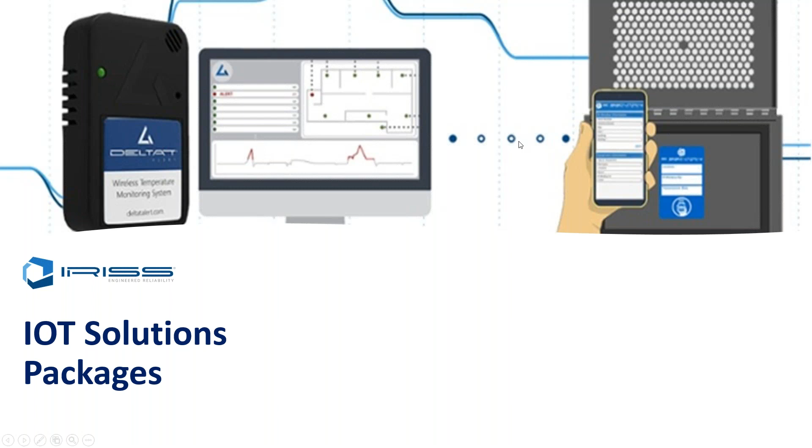Then we come over to our IoT solutions packages. We have our Delta T temperature and humidity monitoring sensors. They allow you to get constant data from your equipment whilst no one is out there taking the data down. We have an eSentry Connect NFC data management and labeling solution that allows you to put that data up into the cloud so that everyone can access it from wherever they are in the world.

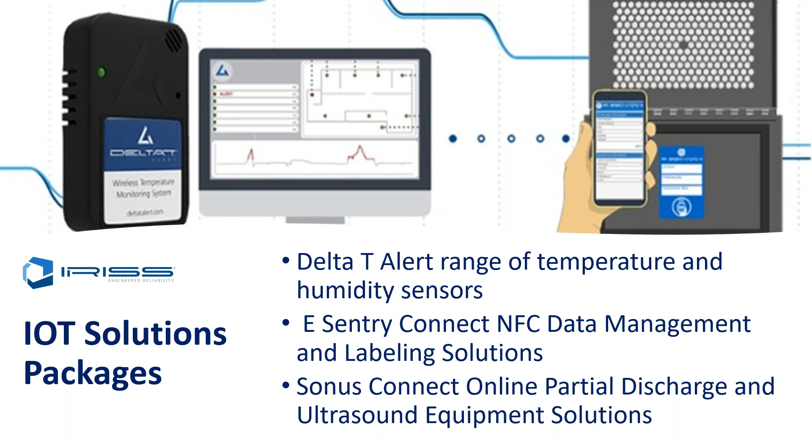And then our Sonus Connect online partial discharge and ultrasound equipment solutions allow you to do remote online partial discharge and ultrasound inspections of your assets when no one's there. And our newest product range is the Safe Connect thermochromic solutions.

Now, what these Safe Connect thermochromic solutions do essentially is they add memory to infrared scanning. If you're looking inside a panel and you're looking with an infrared camera, great, you're doing proactive inspections of your equipment, but the problem is you only see what you're seeing when you're seeing it.

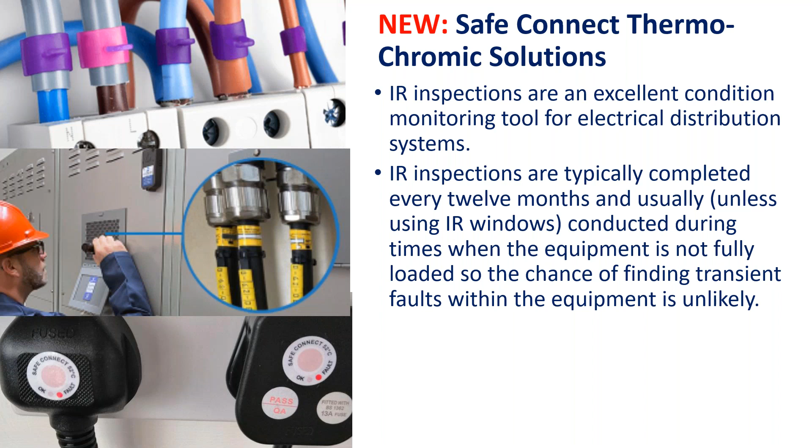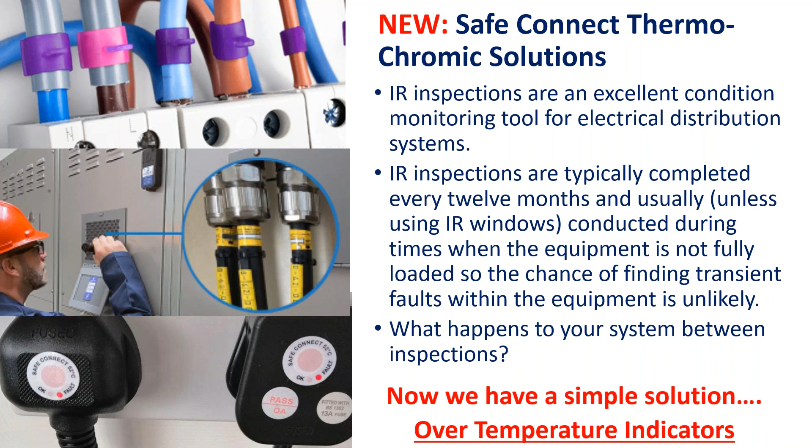Say the panel you're looking at only runs once a month, and then it's overloaded and you don't know about it because you're not looking at it at the time when the panel's running. Well, that's why we brought this out. If you only have a 12-month inspection cycle, you're not going to know if things happen in between those 12 months. But if you leave one of these clips on your system and it changes from purple to pink, it tells you that the system had an issue when no one was looking. It's an over temperature indication solution, and it essentially adds memory to your infrared scanning.

Now, to touch upon Edwards Deming, this is one of my favorite quotes: your system is perfectly designed to give you the results you're getting. What does that mean? If you like the results that your system's giving you, the data is great, change nothing, you built it right. However, if you don't like the results you're getting, then there's a problem with your system, and maybe you need to redesign it to give you better results.

Now, when we talk about maintaining equipment, language is everything. And we need to shift the mentality from maintenance as an overhead to reliability as a necessity. If you ask someone if they want more maintenance, the answer will often be no, because it's seen as a cost. Who wants to spend more money? Maintenance isn't really doing anything, let's just cut that budget. Now let's shift that perspective to reliability. In order to get equipment reliable, it needs to be maintained correctly. Reliability is always going to be seen as a necessity and an asset. If you ask the same question and say, hey, do you want this equipment to be more reliable? Nobody's ever going to say no, because reliability is a necessity, maintenance is an overhead. Language is everything, and we need to send that point home.

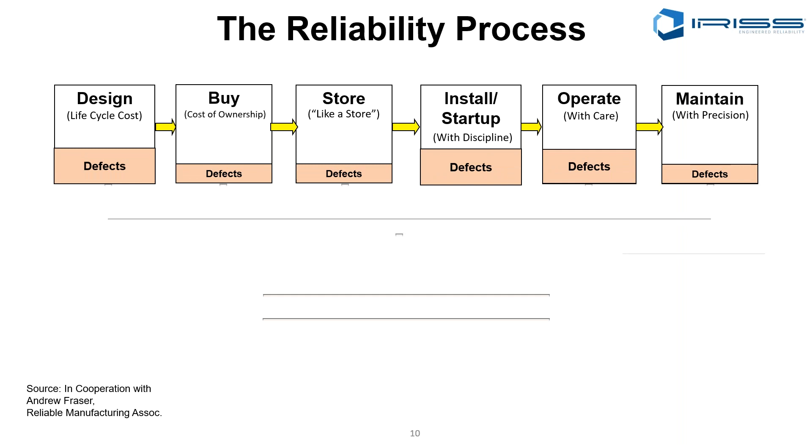So I'm going to touch upon the reliability process. And this slide goes over the design stages of building a program. And people think that you build the system, and when you get to the maintenance part, you just maintain the system that you built. But the problem is that reliability in a nutshell is all about defect elimination.

So when we're designing the system, we can introduce defects. We need to design them out. When we're buying our parts, again, we can introduce defects. We need to buy the correct parts. When it comes to storing the parts you got, you better be storing them correctly. You better be turning them over and making sure they work, because otherwise, when it comes to putting those parts in, again, you're going to introduce defects. Install and startup, we have to use precision maintenance. Be very careful here as to not introduce defects and make the equipment likely to experience infant mortality. When we operate our system, we can again carelessly introduce defects if we don't operate it with care. And then with maintenance, yeah, we can introduce defects, can also take them out.

But the one thing we cannot do, we can't maintain our way to reliability. So what does that mean? We have to put weight into each of these steps, being careful to make sure no defects are being added, and in fact, we're removing defects as we go along. Just remember, reliability is all about defect elimination, and you cannot maintain your way to reliability.

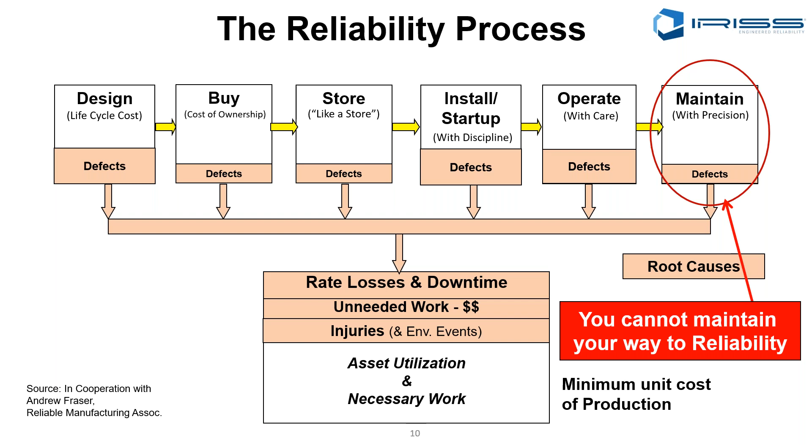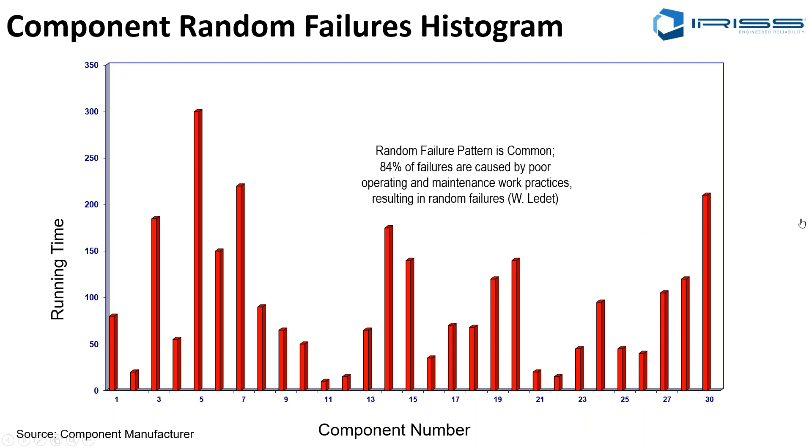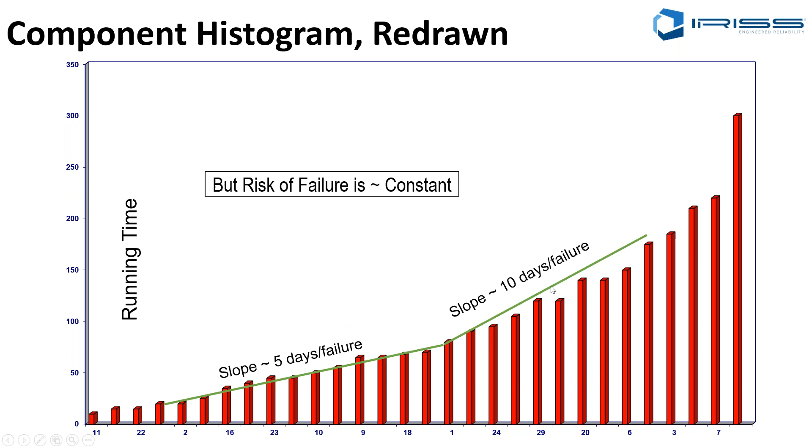Now, if we rearrange that histogram, put it from fastest failure rate to longest failure rate, what do we see? Roughly half of our assets are failing in the 5-day period, and roughly the other assets are failing in a 10-day period. So how do we maintain these assets? If we use a time-based strategy of 5 days because half of our assets are failing in 5 days, then what we actually did is dramatically over-maintained half of our assets. And if we maintain our assets on a 10-day cycle, then we're dramatically under-maintaining our assets that fail in the 5-day cycle. So this asks the question, what do we do? Time-based clearly doesn't work because things don't fail on a time-based cycle. So what we have to do is move from time-based to condition-based way of thinking, where we see what the assets are telling us and then move forward from there.

Now, these 4 studies are major studies on reliability-centered maintenance. Two were done by airlines, the United Airlines study and the Bromberg study, and two were done by the US Navy, one on surface warships and one on submarines. The studies went over the different failure patterns and the distributions of those failure patterns, and there's some interesting results.

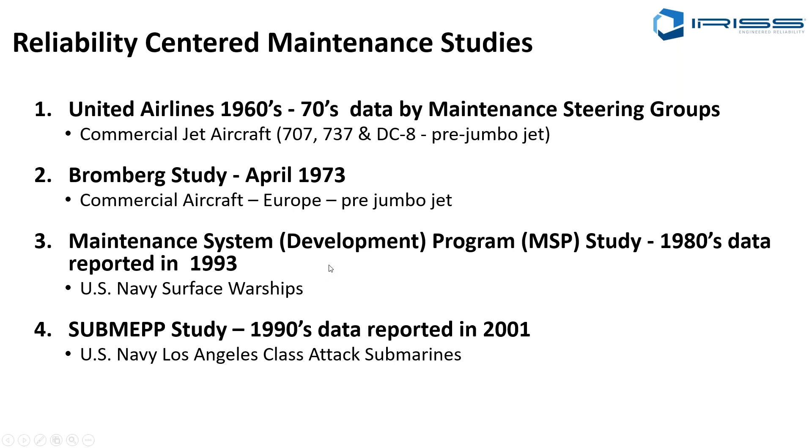The first 3 failure patterns we see are the bathtub curve, the wear out curve, and the fatigue curve. Bathtub failures happen typically 3 to 4% of the time. Wear out, 1 to 17% of the time. Fatigue, 3 to 17% of the time. This is the data from each of the individual studies, and it's pretty consistent.

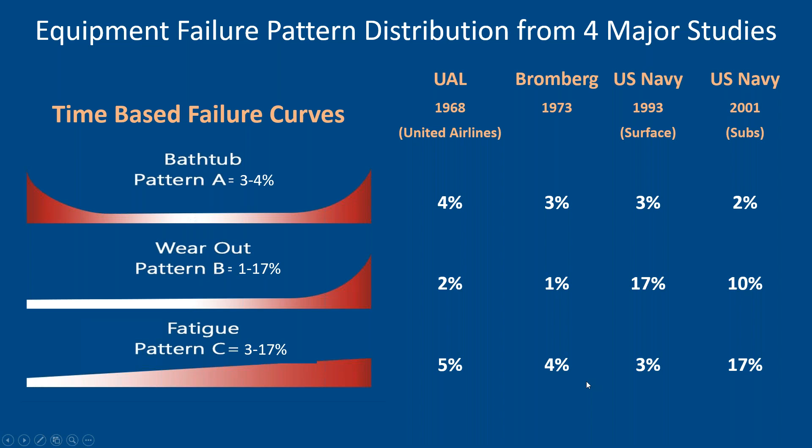Now we come to the next 3 failure curves, and this is where we see the majority of failures. The initial break-in period is 6 to 11%, random is 14 to 22%, and infant mortality makes up the majority at 29 to 68%. Now, what is infant mortality?

It's when you put your equipment into running conditions and you don't do a great job at being careful in what you're doing, so you introduce defects. Or the alternative is you go back into your equipment, touch things, tighten them, physically interact with the gear, which resets the infant mortality curve.

From these studies, we see that the Navy doesn't quite agree with the general business results, and the reason is that the Navy practices super precision maintenance. The book on doing any activity in the Navy is 5 inches thick and tells you everything. If you've got to turn a bolt, it tells you how to turn that bolt, how many degrees, at what temperature, how you put lubricant on it afterwards, and then where you'd put it into a bed and tuck it in at night. The maintenance practices are fantastic, but they typically aren't realistic in the world outside of the military.

Then we come to random failure patterns, and you see more random in the Navy because they've worked out the infant mortality problem and come up with a better way.

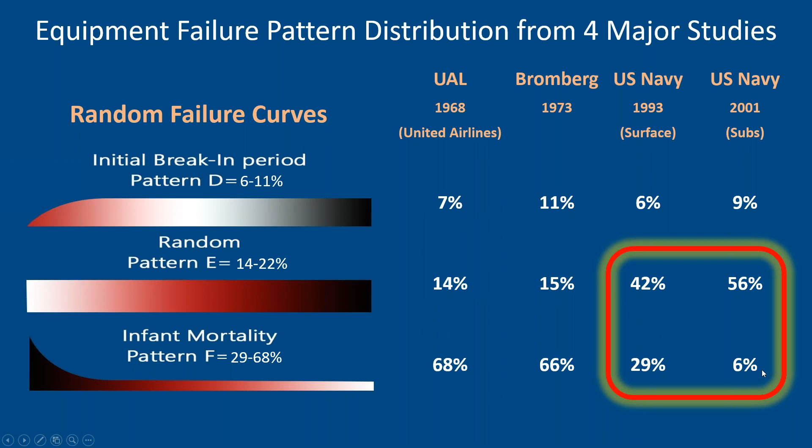So what are the effects of time-based maintenance on infant mortality? This shows us different times where you would be inspecting equipment on a time-based maintenance schedule. But the only point you should actually be doing anything with your equipment is right here. You know why? Because there's been a change. Your equipment's telling you, hey, something's not quite what it once was. Let's go in there, take a look, and conduct repairs based off the results of taking a look.

Touching the equipment here, here, here, and here on a time-based schedule did nothing. There was no reason to interact with equipment. Here it's trending in a better way. Here there's no change, no change, no change. Oh, change. Let's go take a look.

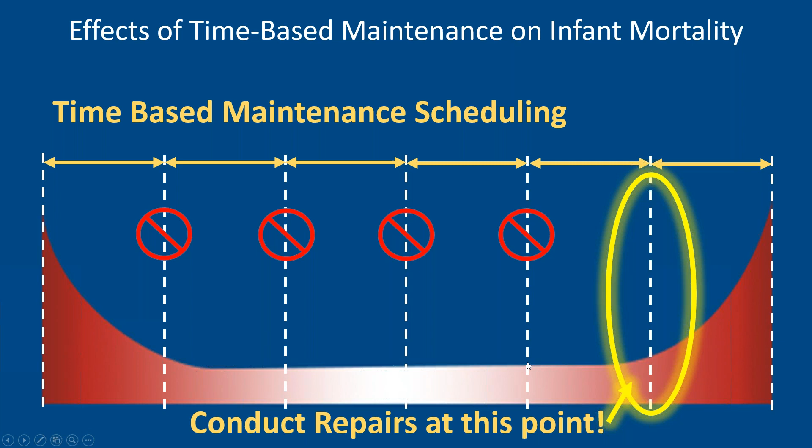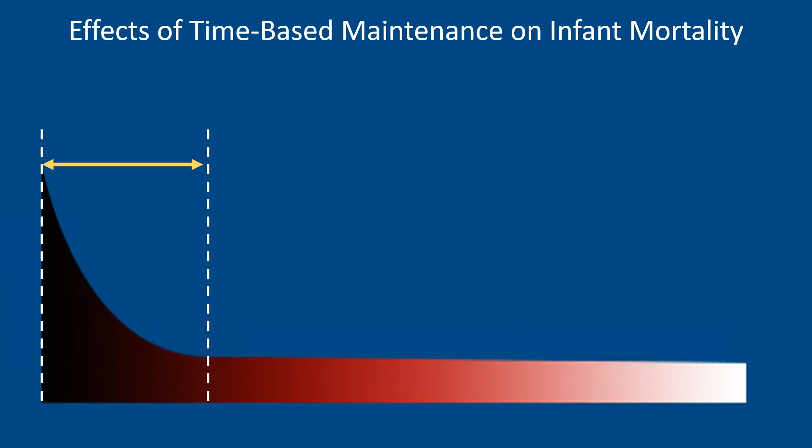We can inject defects every time we physically interact with equipment. So what does that mean? Don't interact with equipment. There is no reason to touch equipment for no reason. All we do is introduce the opportunity to inject defects, and we reset the infant mortality clock, which, as the slides prior showed us, was the time where we're most likely to experience failures.

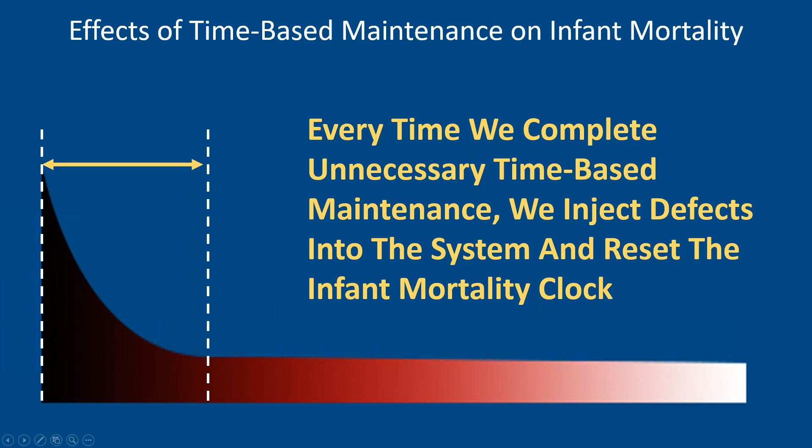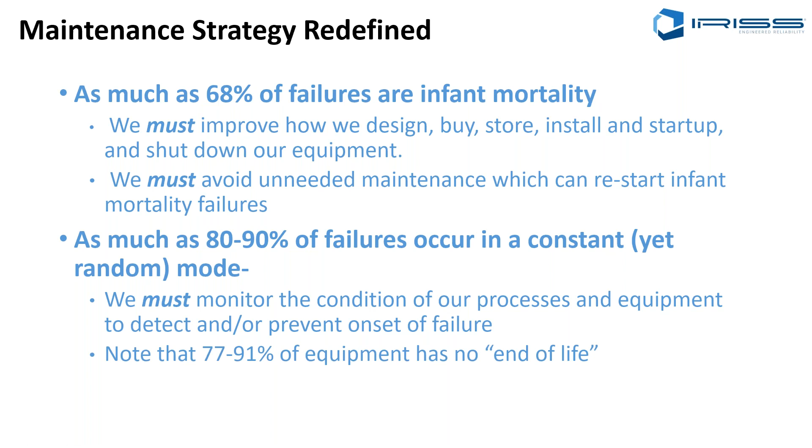So what if we could redefine a maintenance strategy? As said earlier, as much as 68% of failures are infant mortality. We can improve this by avoiding unnecessary maintenance, and by how we design, buy, install, store, and start up equipment. Unfortunately, as much as 80 to 90% of failures occur in a constant yet random mode. For this, we must monitor the condition and only interact with it when we see an onset of failure or a reason to do so, because 77 to 91% of equipment has no end of life.

So let me give you some examples of maintenance strategies. Strategy 1: there's a shutdown required. The asset isn't broke, but we're fixing it anyway. That don't really make much sense.

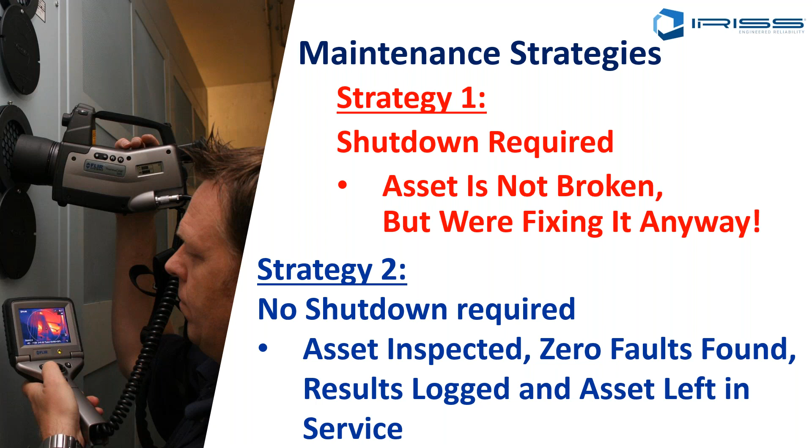Strategy 2: no shutdown required. The asset's inspected, zero faults were found. The results were logged, the asset was left in service. Sounds a little more logical.

Strategy 1, isn't broken, we're fixing it anyway. That's planned time-directed maintenance. Strategy 2, we're looking at what's going on. There are no faults. We record the data, we set our trends, we leave the asset in service, and we come back and look at another date. This is a condition-directed repair program. The conditions didn't direct a repair, so we didn't do one.

This leads me to a really fun fact I bring up all the time in presentations. The Mars Rover was designed by NASA engineers to last 90 days. Do you know how long it actually lasted? 14 years.

This is a highly engineered piece of equipment that people didn't think would last longer than 90 days, but it lasted 14 years. Why? There's nobody on Mars to touch and mess with things, tweak, break, crank, try and fix it. Like we said earlier, if it's not broke, don't fix it. You know what killed it in the end? The batteries died. Certain components will eventually wear out over time, but this machine went far above and beyond because people left it alone to do what it was designed to do.

This brings us to about the first third of the presentation. I'm going to stop and see if anyone has any questions, anything they need clarification on.

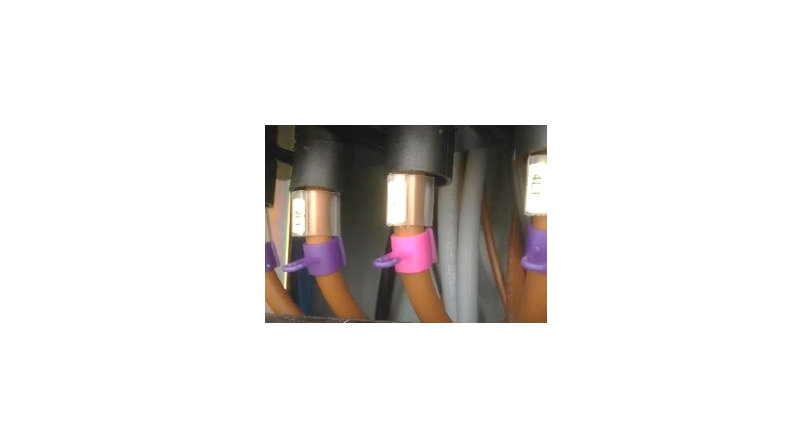Here are some examples of poka-yoke or mistake-proofing devices. This is a thermoclip, one's purple, one's pink. You can look at it and see simply that on the pink one, something's wrong. There's been temperature indication. No one would have any issue using that.

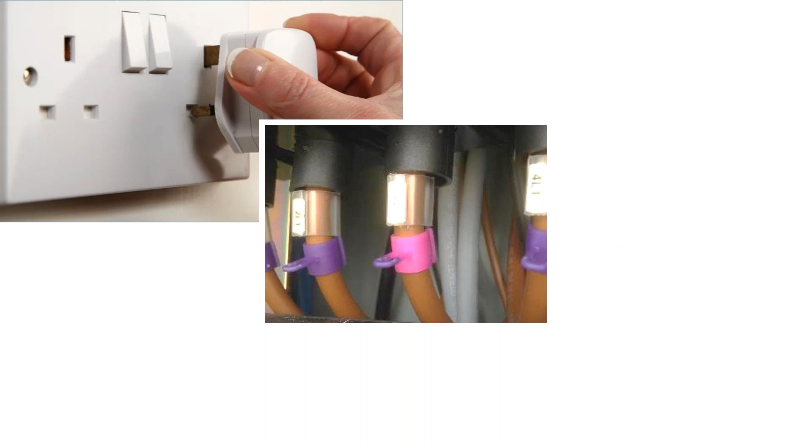Here's a UK plug socket, another poka-yoke device. It goes in, it has a very specific configuration of pins that will only be the only pins that will fit into that hole to get the power out of it.

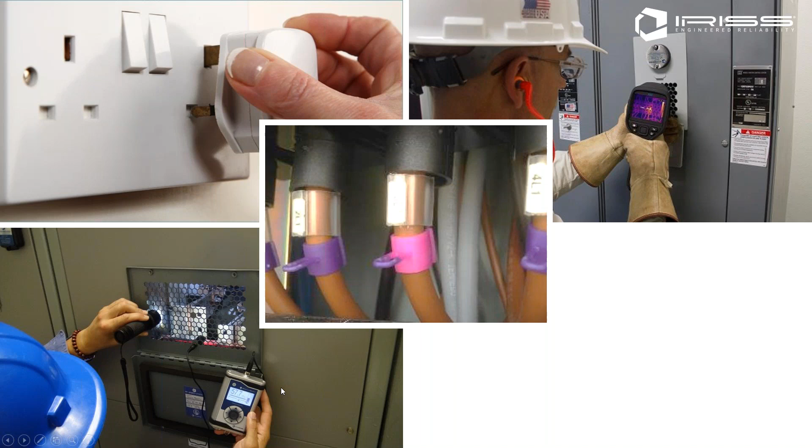This is an infrared window, keeps you in a closed, guarded condition while still being able to get thermal data from your equipment. This is an infrared window with an ultrasound port. Same concept, but it allows you to get ultrasound data from your equipment while it's in a safe, closed and guarded condition. And this one's kind of silly, but it's exactly the same point.

A McDonald's bun gauge, it's a poka-yoke device. You've got your guys in the kitchen making product. Then when it comes to inspecting the product, guess what? It's a go, no-go gauge. Simplicity is key because it keeps people safer and it improves everything.

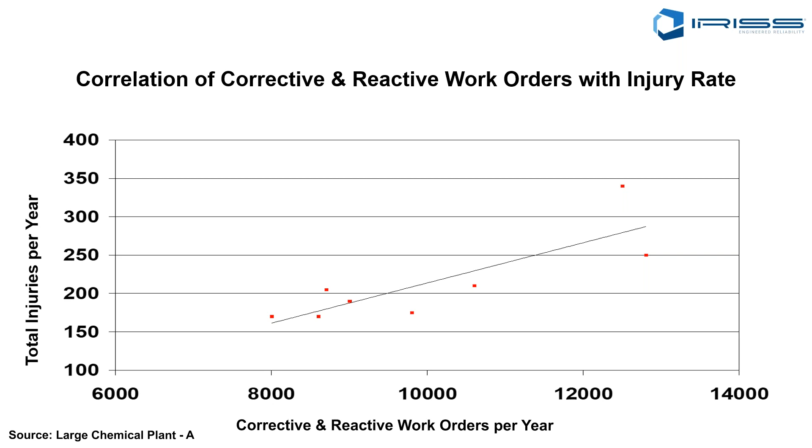Here's a study from a large chemical plant that shows the correlation between corrective and reactive work orders per year and the total injuries per year. This shows that the more corrective and reactive work we do, the more people get hurt. Makes sense, right? Because corrective and reactive work only occurs when a problem happens. There's no strategy to get it done, and now everyone's super stressed out and they're running like headless chickens to fix the problem, and that's when people get hurt.

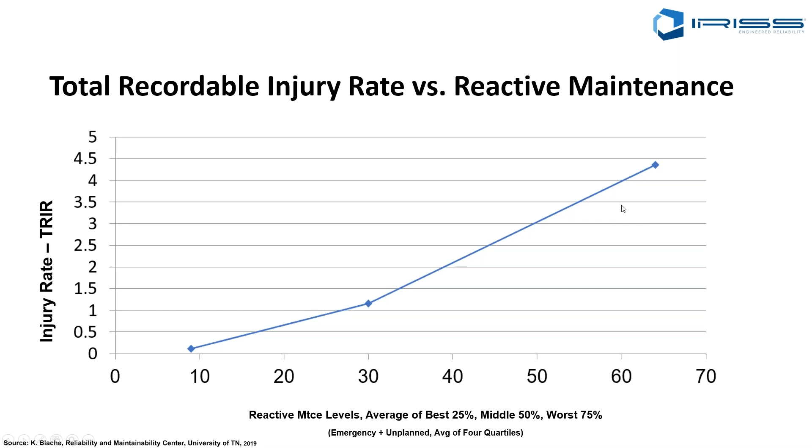This graph shows the same point: reactive maintenance levels and total recordable injury rate. The more reactive our maintenance is, the higher our injuries are. And this final slide shows the same point, but when we move to condition-based maintenance work orders every year, the planning is better. As the planning is better, people are less stressed, there is less pressure on getting the job done, and as a result, we see a decrease in injuries as more CBM work orders are used.

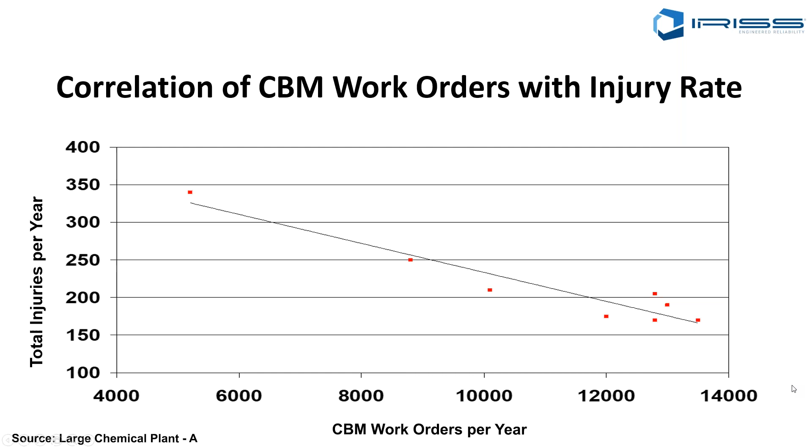We have to design systems to make it easier to do the right thing than the wrong thing. That is it in a nutshell: defect elimination and helping people to not get hurt. Human error is inevitable, and using DFSR allows us to design our systems and processes around this inevitability.

So that brings us probably about the halfway mark, and I'm going to stop again to see if anyone has any questions or clarifications needed.

So Josh, I have one question I wanted to put through to you. How do we get people, management and supervisors, to move from time-based maintenance to condition-based maintenance? And how do we make a case for change?

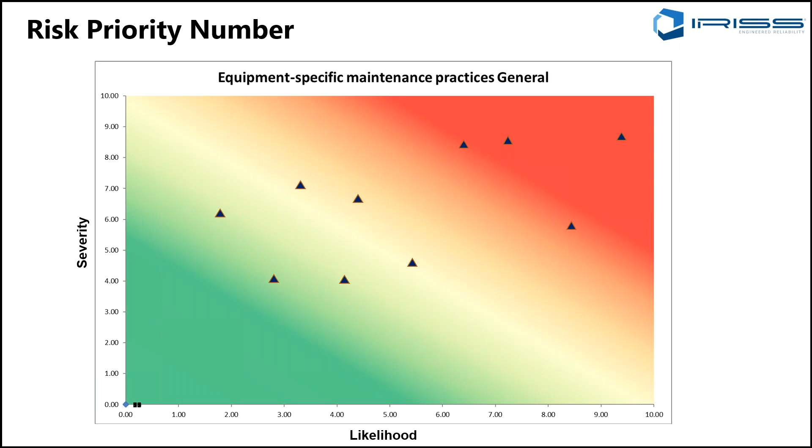Risk priority number is calculated using a number of different methods, but the simple method is to use the likelihood of failure multiplied by severity of failure. The number can be used to assess the required maintenance systems to ensure the risk priority number is managed within acceptable parameters. The above graphic again shows a risk priority number heat map.

The thing about risk priorities is it's all about your risk appetite and tolerance, and according to the Institute of Risk Management, risk appetite can be defined as the amount and type of risk that an organization is willing to take in order to meet their strategic objectives. Organizations will have different risk appetites depending on their sector, culture, and objectives. A range of appetites exists for different risks, and these may change over time. While risk appetite will always mean different things to different people, a properly communicated appropriate risk appetite statement can actively help organizations achieve their goals and support sustainability.

Risk appetite and performance—it's all about the pursuit of risk. Risk tolerance is about what an organization can actually cope with. Organizations have to take some risks and avoid others too. To do so, they need to be clear about what successful performance looks like. This question may be easier to answer for a commercial organization than for a governmental department, but it can usefully be asked by boards in all sectors.

This is something worth noting: the higher an organization's risk appetite, the lower their management costs. And inversely, if an organization has a very low risk appetite, there's a lot more risk aversion, and a lot more costs associated with that.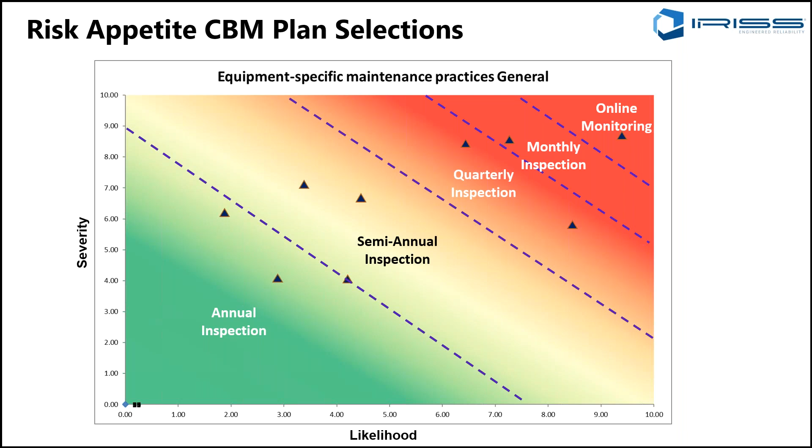So from here, we go back and look at that risk, the heat map of risk that we just drew. We see that the stuff down here, it's not super likely, and the severity is not that bad. We'll just leave it on an annual inspection.

Here, all right, we're getting a little bit worse. Maybe we'll check it twice a year. Now we're starting to get a little bit more concerned about the consequences, so we'll look at this 4 times a year. This one, we're going to look at 12 times a year. And over here, this is going to bring my operation down, so I need to know what's going on with that constantly. So we're going to drop in an online monitoring solution.

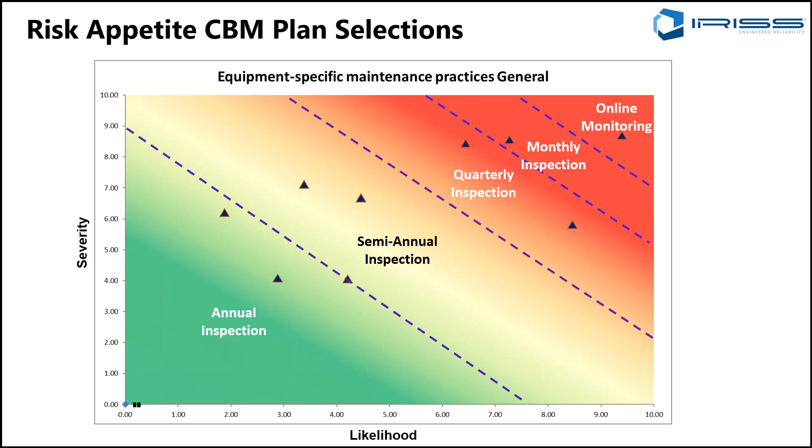Now that we've looked at that, we can bring down our severity number. Our probability of occurrence and detection numbers are going to increase. What does that do to our data as a whole? It drops the risk of everything by simply implementing a design for safety and reliability program. Risk priority number is now going to be recalculated due to these changes, and that lowering in the risk priority number is why we see the graphic on the screen that showed everything decrease.

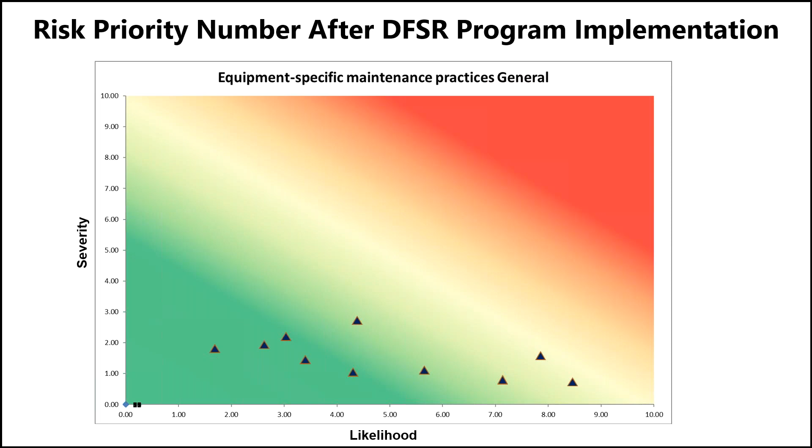This brings us to the upcoming skills gap, and it's kind of scary when we're looking at some of the data I'm about to show. We need to bridge this skills gap. For the last 3 years, the hardest segment of the workforce for employers to staff with skilled talent hasn't been registered nurses or engineers or even web developers. It's been the skilled trades, the welders, electricians, machinists, etc., that are so prevalent in manufacturing and construction.

But if these skilled trade workers are difficult to find now, as Manpower's survey indicates, just wait a few years. The skills gap is likely to become more acute as over 50% of skilled workers in the United States were 45 years and older, according to EMSI, Economic Modeling Specialists International, and 18.6% were between the ages of 55 and 64.

This graphic represents what I just said. Here we look at electrical and electronics repairers: 75% of them are over 45, and of that, 35% of them are over 55. Electrical and electronics engineering technicians: 70% of them are over 45, and of that, 40% of them are over 55. Now we come down to electricians, the guys who are actually twisting bolts and fixing things in the factory. This one's real concerning because 65% of these guys are over 45, and of that, 25% of them are over 55.

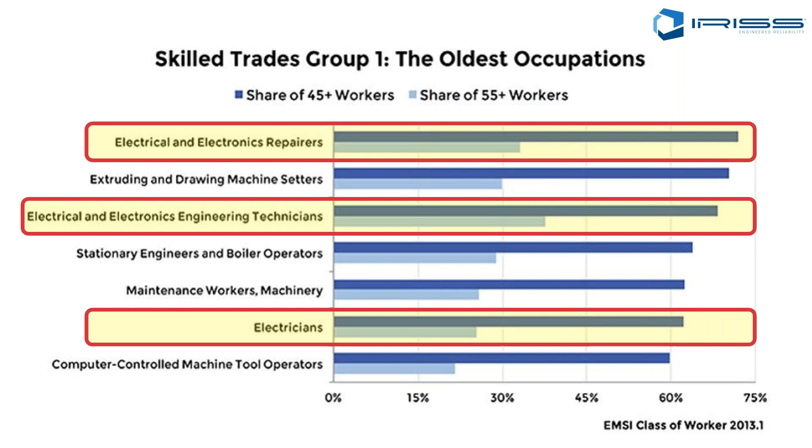What's going to happen there? How are we going to bridge that? That's where EAMs come into it, because people with technical skills like electricians, electrical and electronics engineering technicians, electrical and electronics repairers, these guys have skills and need to be using those skills as often as possible. What an EAM does is remove some of the busy work so they can get right on doing the work that makes a difference. That's going to be the way we get around this skilled labor shortage, until we can change the mentality that the only way to success is a 4-year degree, when people in the trades have just as much of a shot at success, even more with these upcoming gaps in the future. We just need to look at this, guys, and really come up with a way to bridge it.

Now, this slide is from Ramesh Gulati at Jacobs Engineering, and it's really, really interesting. It shows the impact of designing for reliability and safety on the total cost of ownership of assets over their lifetime. So this shows that 75% of the total cost of ownership of an asset comes from the operation and maintenance phase, which is the majority of the factory's or asset's life. And only 25% of those costs are incurred in the acquisition phase.

If we look at this red dashed line, it shows what would happen to the total cost of ownership through the life of the asset if, during the acquisition phase, every opportunity for improvement was taken. It's not cheap when it comes to acquiring it, and that's what scares a lot of people. But if you put the money in at the start, you can see that this trend decreases over time.

When you get to the part where you're at 75% of the cost you will experience throughout that asset's life, it offers you the lowest expenses on that asset.

Then we come over to this orange line, which is the exact opposite: the total cost of ownership of an asset with zero asset management. We can see here that it's definitely the cheapest way to get an asset into service.

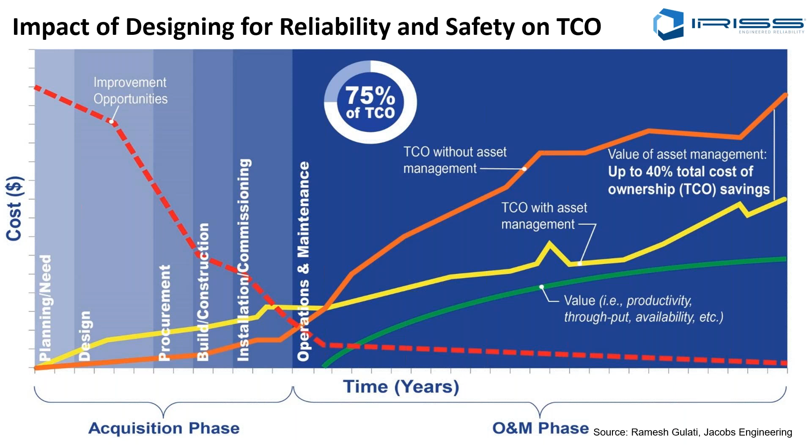This leads me to a different point: reducing carbon footprint. Lots of organizations are starting to get a push from the top to decrease their carbon footprint. That sounds like a pretty big task, right?

Maybe not, because every time we do time-based maintenance, we have to have parts shipped to the factory. Once we order them, they've got to be driven there. And there's the gas, the fumes, the pollution generated by driving and moving assets around.

Then there is turning your power off, right? You're running generators to run your heavy equipment. That's again creating pollution and increasing your carbon footprint.

The money we're spending buying these replacement parts that don't need to be replaced, and then throwing them away, filling landfills up with parts that still had useful life in them.

Super unnecessary. But if we shift the mentality from time-based to condition-based, and only do things when they are actually necessary, then we're not going to be using all these parts we didn't have to use. As a result, you're going to see a dramatic decrease in your carbon footprint and your budget, and your business will run more efficiently because you didn't do things you didn't have to do.

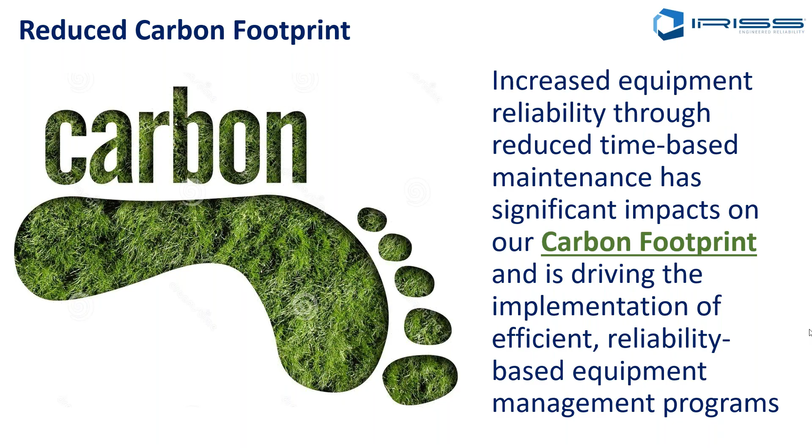So this is a case study on an inspection with and without an EMSD safety tool to allow us to be more efficient.

A data center currently had 250 critical electrical systems that were inspected annually. The reason they were inspected annually was the intrusive nature of the condition-based monitoring inspection they were doing. Miles, why was the condition-based monitoring inspection intrusive?

Well, that's because these guys were doing it fully energized. They were doing it in compliance with NFPA 70E and 70B, but the panels were energized, which makes it a much more difficult inspection. As a result, the inspection was completed by 2 site electricians.

They were only there to pull panels and make sure things didn't go wrong. And then you have 1 contract CBM company that's there to do the actual inspection. This annual CBM inspection currently takes 951 hours.

So let's break that down. 42 hours of that time was spent on the CBM engineer putting on a PPE suit. 84 hours were the 2 electricians putting on their PPE suits. That's 126 hours. 250 hours were cover removal.

25 hours were the actual condition-based maintenance inspection. 250 hours were the cover replacement. 250 hours was the CBM engineer just waiting for the electricians to do their work. And 50 hours was the 2 electricians waiting while the CBM engineer did his work.

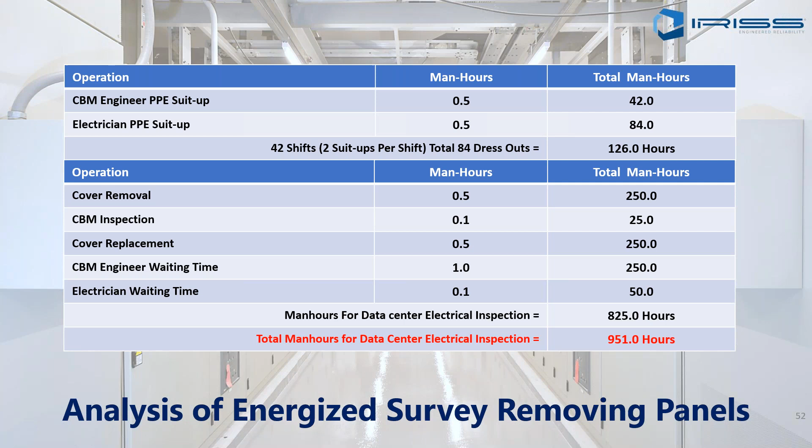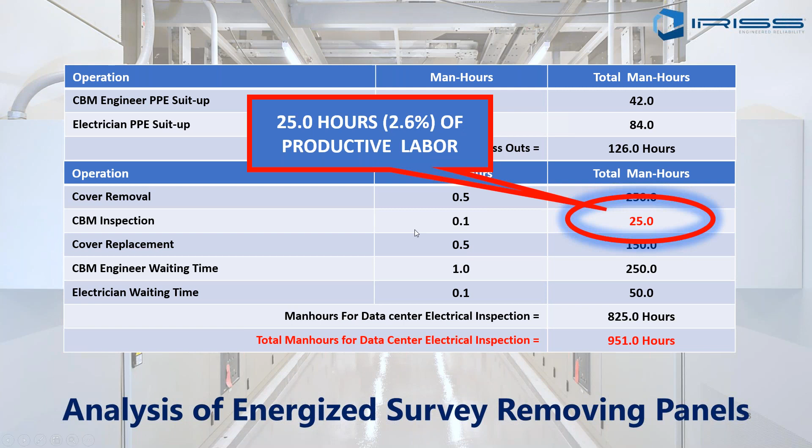This came to a total of 825 hours for the electrical inspection, and the whole job was 951 man hours. Of that, only 25 of those hours were productive, which is 2.6% of the labor that was done.

Crazy. What does that mean? 926 hours, or 97.4%, were dangerous, high risk, unproductive labor. It begs the question, why would we want to do it that way if there was a better way?

And there is a better way, and I'll show you that right now. This is the same analysis of that energized inspection, but now we're going to use EMSDs.

We can now see that the CBM engineer has no hours spent putting on protective suits. The electricians have no hours putting any suits on either. You know why? You don't need to wear a suit anymore. There's no cover removal, and the CBM inspection went up to 30 hours.

Slightly longer, but only one guy doing it. Cover replacement, there is none because they never come off. No one's ever waiting because you can walk up to an asset and take your data, and there are no electricians waiting around. What did that do?